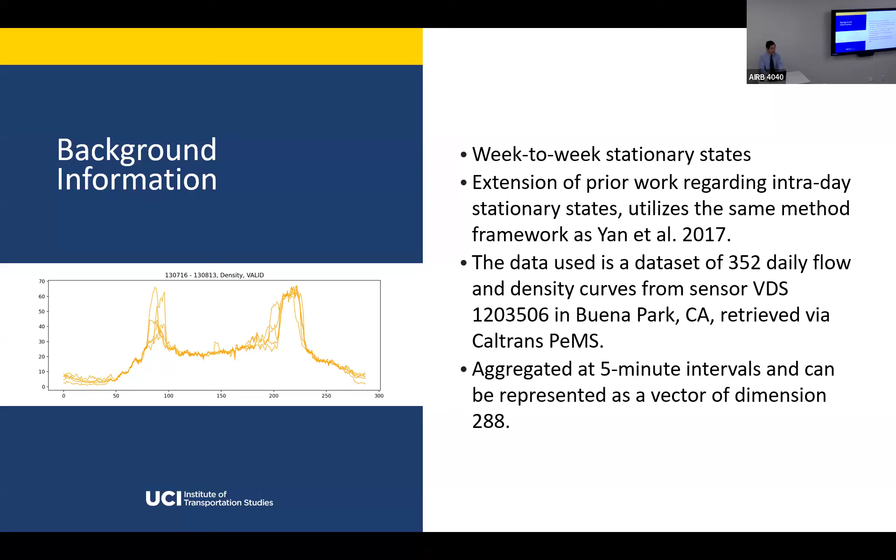Data was collected using 352 daily flow and density curves from sensor VDS 1203506 in Buena Park. It's an aggregate of 4 lanes, and the data was collected between 2011 and 2017. Two periods in this dataset were discarded because of lack of sensor uptime. The minimum granularity provided in the PEMS dataset is 30 seconds, but we used 5-minute data intervals because this reduces some of the variance and noise in the data.

This method has 3 steps. Firstly, we can use heuristic threshold values. That is the value at which a curve is considered too non-conformal for a segment. I'll go into this a little more later.

We iterate over penalty values using the Pelt method to find the one with the most meaningful state candidates. With this appropriate segmentation, we can determine the maximum distance threshold best for outlier detection. If the initial and final threshold values have a significant difference, we reiterate this method with a different initial threshold. We discard segments of length 2 and below as insignificant to be determined as a week-to-week stationary state.

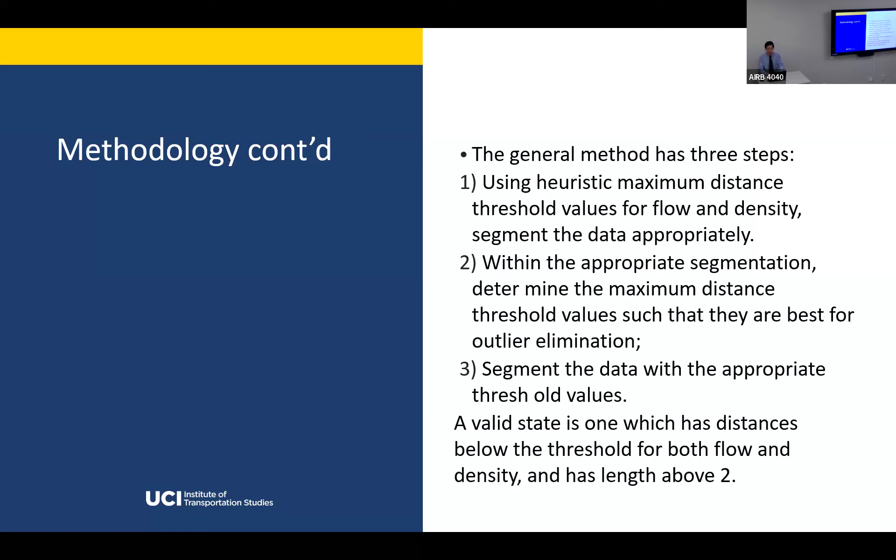To segment our flow and density vectors, we use the Pelt method. Pelt stands for pruned exact linear time. It's a method in which, as stated in linear time, we can find a segmentation that reduces the variance amongst individual segments in a time series.

We can minimize over and underfitting through our choice of the penalty value, minimum distance, and the threshold. That is the value which the Pelt method seeks to minimize - it's a sum of the cost function and a selected penalty value. We will use the radial basis function kernel for our cost function.

As we stated, data is collected in 5-minute aggregates, so every day's flow and density curves can be represented as a vector of length 288. The radial basis function kernel transports each 288-dimensional vector into a higher dimensional Hilbert space. Since the space cannot be worked with directly, we utilize the kernel trick.

The benefit of using the radial basis function kernel here is that we can identify the underlying distribution from which the traffic curves come.

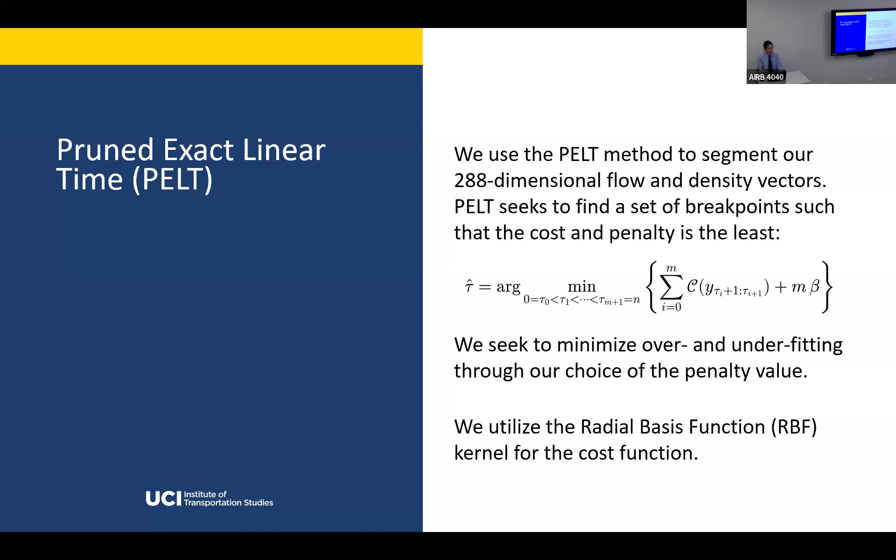The original method used in the previous paper that we were trying to extend used L2 Euclidean distance, and we believe that the radial basis function distance is more robust than this distance metric.

So now we go into the actual experimentation with the data. Using our heuristic threshold values, we can find the penalty value with the most valid segments. The segments are defined as the points between two consecutive breakpoints in the breakpoint union of flow and density.

We apply the PELT method separately to both the flow and density time series, then take the union of these two. By selecting the one with the most valid candidate intervals, we can minimize over and underfitting. If we overfit, many intervals will fall below the length threshold we set at 3 weeks, and if we underfit, intuitively the amount of valid segments would decrease. We find the most valid candidates at a penalty value of 0.037.

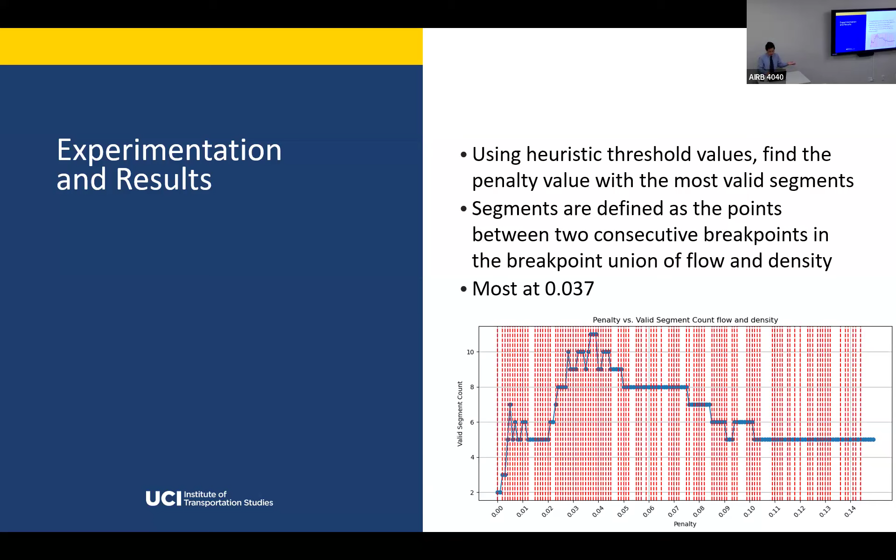Now, the second step is to appropriately choose our distance thresholds. Firstly, we assume that the median distance in this distance distribution represents what should normally be acceptable for a near stationary state. The goal is to filter out segments which contain abnormally high distances from the segment mean, which cannot be considered within the stationary state.

As we decrease the threshold value and start to lower it, we would initially expect that the root mean square distance on average decreases, as it's more conformal to the distribution. Once we start to overfit this threshold value, it would increase again as it's no longer conformal to our distribution. So this is sort of a correlation, if you will, to see how well everything conforms with the initial distribution.

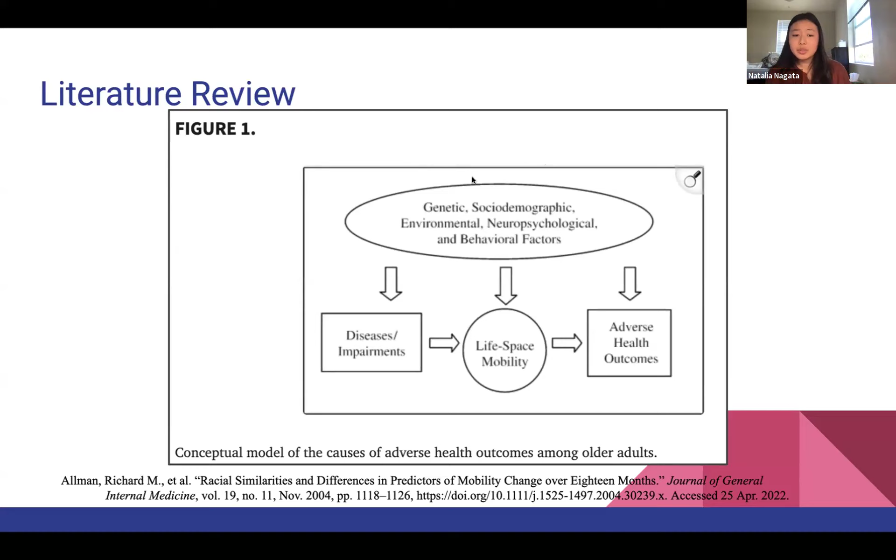This model is taken from a study that basically compared the mobility change between different racial demographics. And basically they created this model that says all these factors like genetics, environment, and behavior can contribute to or influence disease, mobility, and adverse health outcomes.

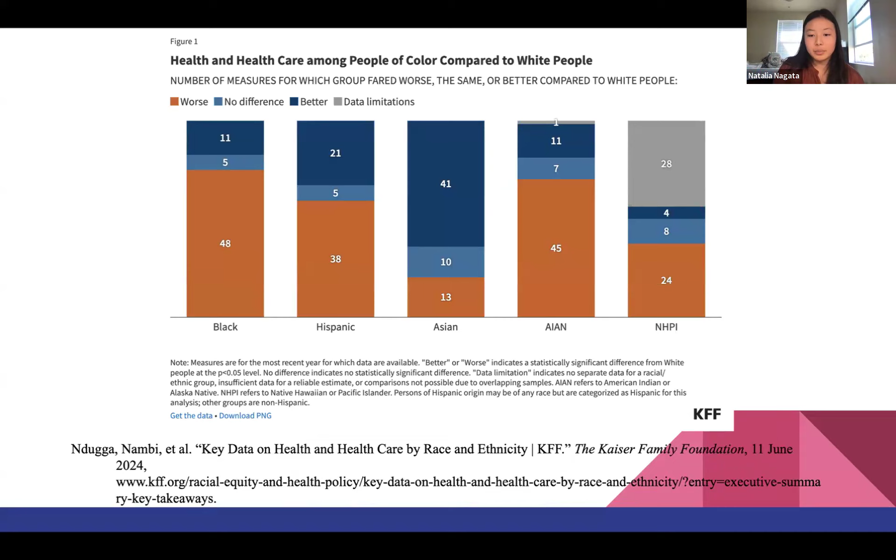And we also wanted to explore the psychological theory called self-determination theory, which was coined by Ryan and Deci. They're basically saying that autonomy, competence, and relatedness contribute to motivation and well-being. So when you have supportive environments, that can enhance these needs, and unsupportive ones can hinder that engagement. And when we have structural inequities in infrastructure, that can restrict choice, reduce perceived competence, and limit social connectedness.

And that can reduce physical activity and fall prevention participation among those who are impacted. Autonomous motivation also can sustain health behaviors more than external pressure, but you also need competence and relatedness to help that. By applying the self-determination theory, we can structure fall prevention programs to support those three needs and boost motivation and well-being to overcome these infrastructure-related barriers to increase fall prevention adoption.

So for our survey design, we used the Likert scale and open-ended questions because those are the most accessible ways to assess what we're trying to find. And we're using 5 different categories: health and wellness, outdoor spaces, social participation, transportation, and accessibility.

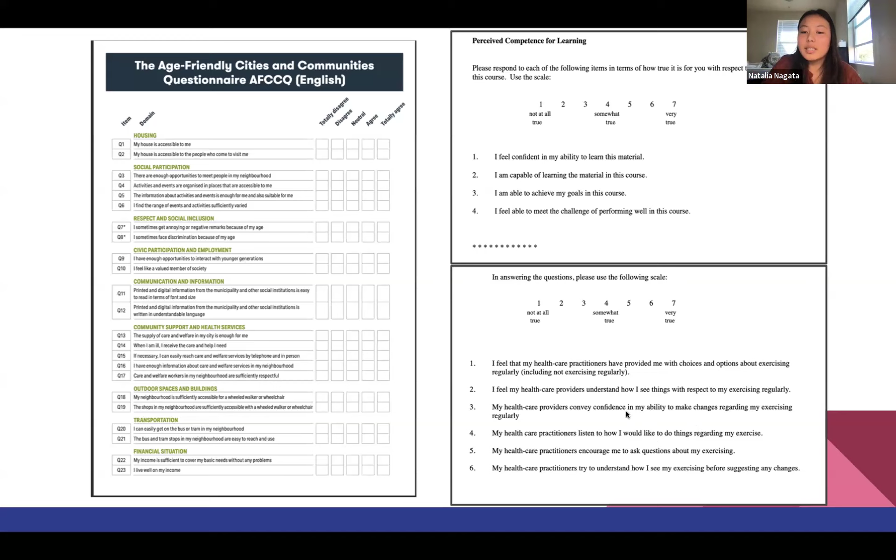This example is for learning, but again, we're using it for physical activity and social inclusion. So questions might be like, on a scale of 1 to 7, how do you perceive your competence in terms of physical activity? And for the healthcare climate questionnaire, a similar 1 to 7 scale, assessing how they perceive their healthcare climate.

For future work, we'll be collecting data in person in Santa Ana, and our project is in collaboration with Advocates for African American Elders. We're going to do a statistical analysis of our survey data and submit the paper to the Urban Studies Journal. That's it. Thank you.

Thank you, Natalia. Questions? May I ask one question? Yes, of course. I might have gotten it right. I think on one slide you said non-Hispanic whites have a lower fall rate, but another slide said Black elderly people have a lower fall-related death rate. Or did I get something wrong? Was that kind of contradictory to me?

Yeah, so that's the literature I found that I thought was interesting, in the sense that my literature review is trying to convey that despite existing research saying that Black or African American older adults tend to experience fatalities less than white older adults, they also have worse access and quality of healthcare. I think our project can address that gap, and maybe we could see if we could bridge that gap.

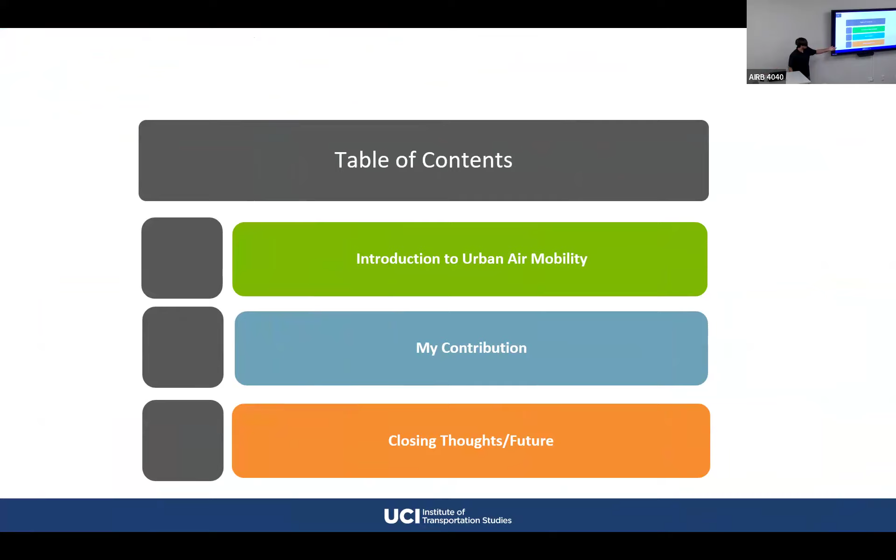So for a brief table of contents, first I'm going to introduce the topic and then present my work, and then I'll have some closing thoughts and reference work.

So first of all, what exactly is urban air mobility? Urban air mobility is the subset of advanced air mobility, specifically defined by the Federal Aviation Administration as enabling highly automated cooperative passenger or cargo air transportation services in and around urban areas.

Take Southern California, for example. For our case study, the primary purpose was to alleviate traffic congestion using eVTOL, which stands for Electric Vertical Takeoff and Landing Aircraft, which I have a photo I'll show in a moment. Because of course, we've all driven on the 405, we know how bad the traffic can get. Some examples of current front runners in this brand new topic is Joby Aviation.

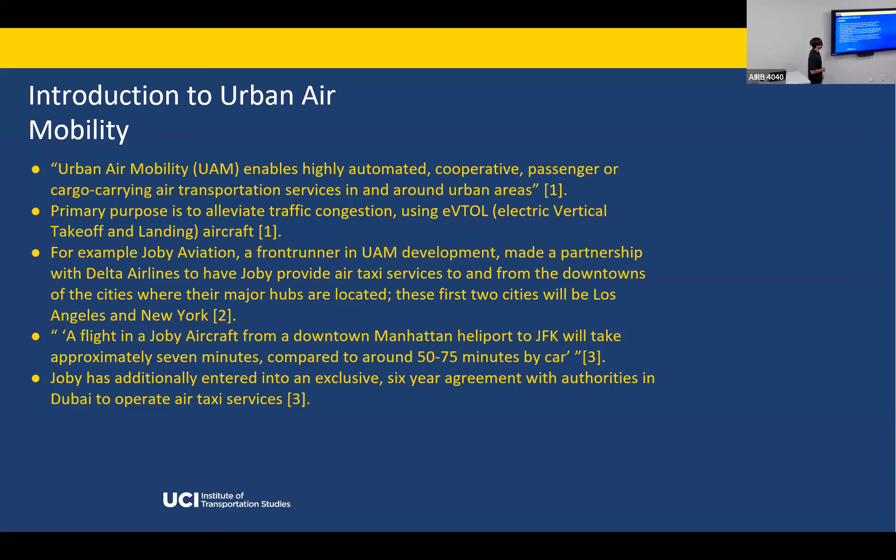They have actually just signed a partnership about 2.5, 3 years ago with Delta to provide Joby air taxi services in between the downtowns of their major hub cities. The first two of these cities will be Los Angeles and New York, as those are some of their largest bases. According to Joby's CEO, a flight on these Joby aircraft from downtown Manhattan to JFK should take about 7 minutes, compared to 50 minutes to an hour and 15 minutes to actually drive in a taxi or an Uber. Joby has additionally entered into an exclusive 6-year agreement in Dubai to operate air taxi services.

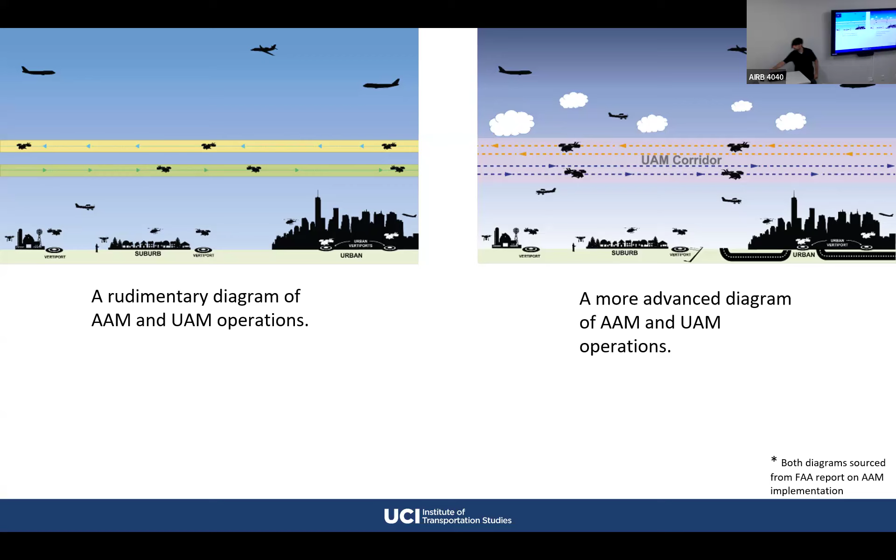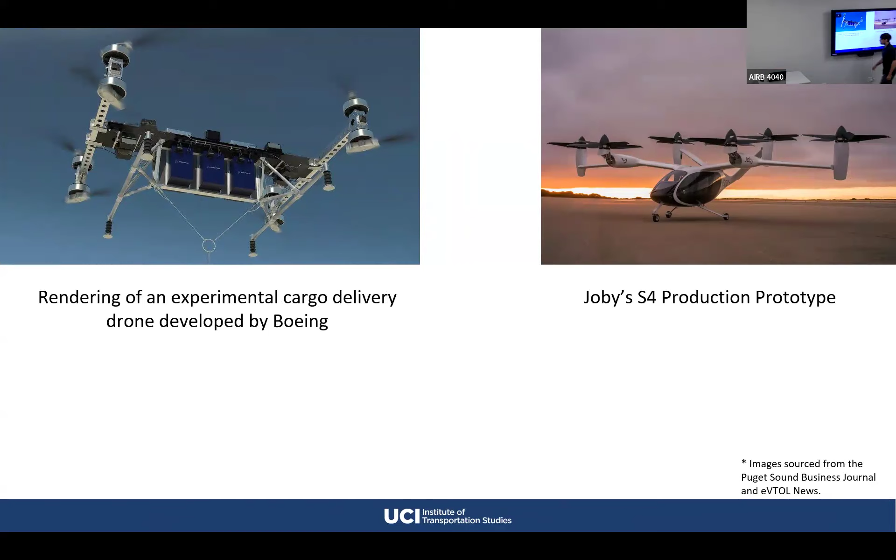As we may or may not know, the skies of Southern California are some of the most congested airspace in the world. Of course we all know about congestion living here in Southern California, there's traffic everywhere and people everywhere. As such, these UAM routes have to be carefully planned in order to not interfere with so-called legacy traffic, which Professor Nguyen mentioned briefly earlier. That is just pre-existing pilot-controlled aircraft.

Think of your average American Airlines flight, for example, or a UPS cargo flight. The three main ways for UAM flights to avoid interfering with this legacy traffic is to either fly above it, fly below it, or just avoid it entirely. But because arrival and departure procedures are different at different airports, since their runway configurations are different, UAM route planners need access to some kind of tool so they can visually see where these legacy traffic patterns are going. That way they can plan accordingly. That was my primary task: to develop a preliminary tool that we can use to model legacy traffic patterns into airports.

So, implementation. The case study that we chose to analyze for the summer was just a basic route along the 405 between right next door here at John Wayne Airport and then Long Beach Airport. We're using ADS-B positional flight data from OpenSky's network. This ADS-B data means all aircraft are equipped with a transponder that provides signals to air traffic control about the speed, the heading, and the position of the airplane. We're taking that data that was collected from various receivers everywhere, including obviously airports, and that's where we're getting the data from.

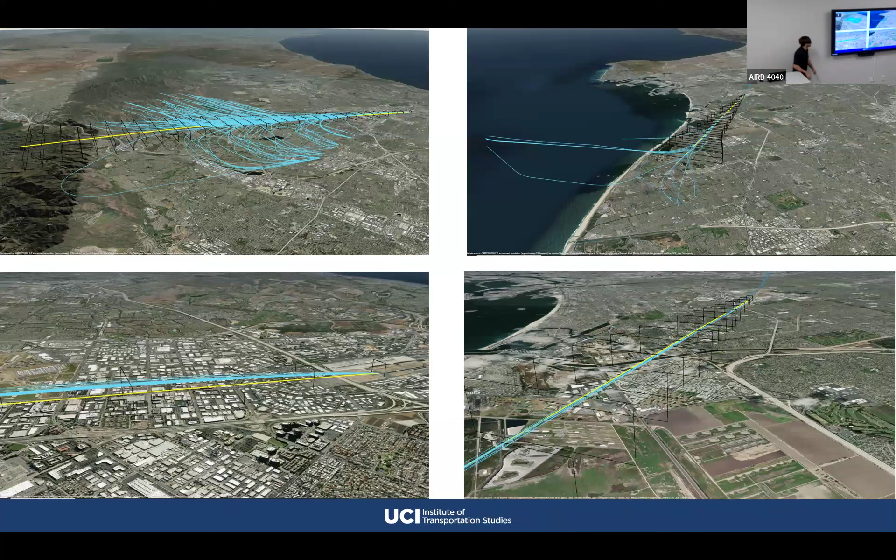All right, so let me go through these one by one. First of all, up here on the top left, these are called flight tracks. These lines represent arriving aircraft into John Wayne.

As you can see, they're coming from two different directions. Down towards the bottom right, they're coming in from the Bay Area and stuff. Then these ones are coming in from other areas like Chicago or Phoenix. But they all kind of follow this yellow reference path that I was able to draw, and they all come into these rectangles, which we're calling containment zones, so they're in as concentrated an area as possible. That way the UAM route planners can visually see where they can fly and where they cannot.

And down here it's just a zoomed-in feature. This would be classified as short final, so within less than 500 feet before the runway, the tracks come in, and then of course they end right here at the end of the runway.

And then here's one for Long Beach. There's not as many tracks on the Long Beach one because, funnily enough, the data I took was from April 1st and April 2nd of 2024. And I think they pulled some kind of April Fool's reverse trick on me.

So normally the arriving runway is runway 30 at Long Beach, but I believe on April 1st, because of weather or whatever else, they had to reverse operations. They were coming in and landing from the northwest instead of the southeast as typical. These darkish blue tracks, I believe, represent go-arounds, and then they came around to do the actual reverse procedure.

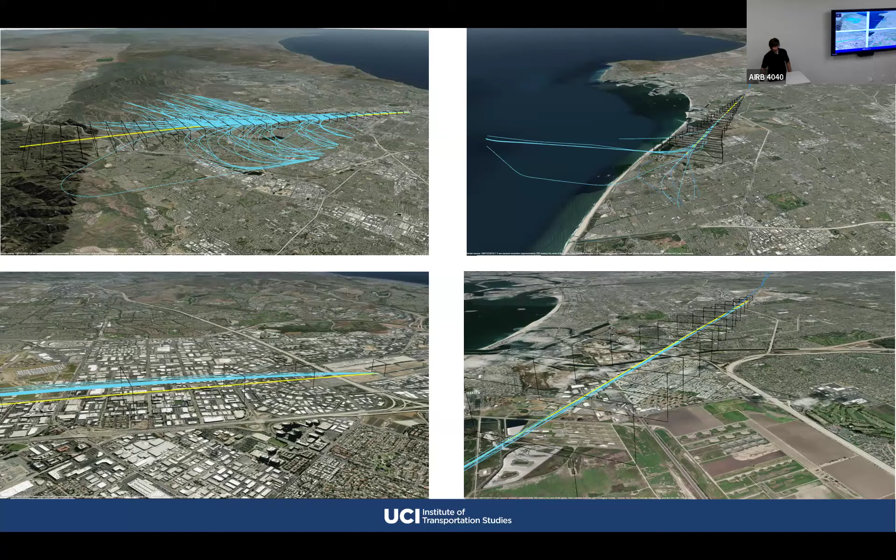So in conclusion, because this concept is in such an infancy, there's plenty of other boundaries that need to be considered. But I chose to specifically focus on mapping these legacy corridors, because that is arguably the most important, since this is what the FAA needs to see as evidence to prove that these UAM vehicles can operate safely and efficiently without interfering with legacy traffic, which of course we don't want to end up in the hands of lawyers and everybody else.

So tools like this, the one I've been developing, need to obviously continue to be improved. As I mentioned, this is a very preliminary tool, and the idea is to develop it so there's access to all airports and all specific arrival procedures. That way these UAM route planners can account for everything. And once they do that, UAM operations will be able to get off the ground.

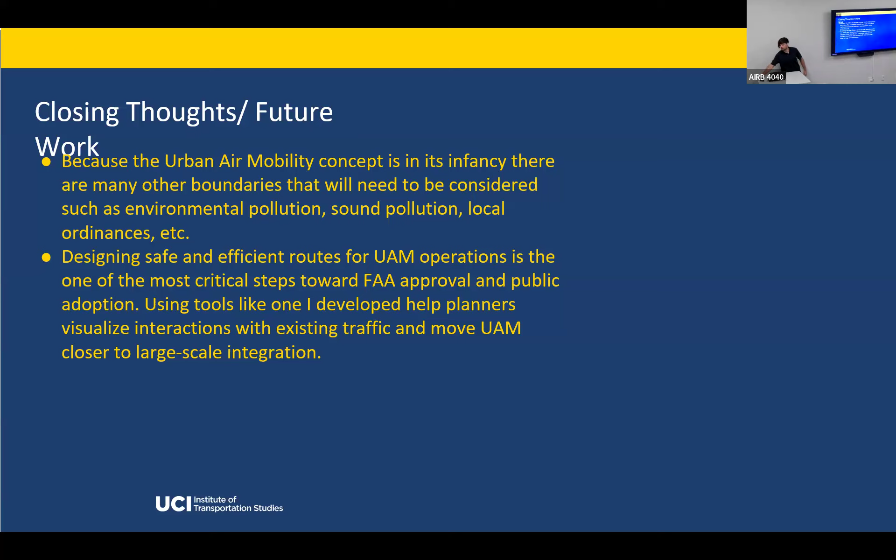And that's all I have. Any questions?

Okay, so just out of curiosity, how much does it cost? A trip, let's say from downtown to a major airport for a passenger? Well, that was actually not my specific area of focus, and in fact Vika is going to be talking about that, so she will be able to answer that question.

I think I have a question that was on your side. Besides airports, what would other no-fly zones be? That would have to be determined through community outreach, and that's one thing I should have mentioned. I primarily focused on airports because that's arguably the biggest hurdle, but then it would be the companies working with communities to establish specific altitude or noise restrictions, like at John Wayne, there's the noise restriction of no takeoffs or landings after 10 PM.

And a follow-up, I'm thinking about other areas. Would the tools you developed also work in suburban, rural areas? Yes.

I should have also mentioned that I didn't really consider general aviation, even though there's a lot of it here in Southern California. I didn't consider it for my models because it's not as predictable, because with general aviation you can get in your airplane, take off, and do whatever you want, whenever you want. But yes, you could do it because even general aviation has those transponders that transmit information, so by just changing the lat-long areas where the data is being processed, you could adapt that accordingly.

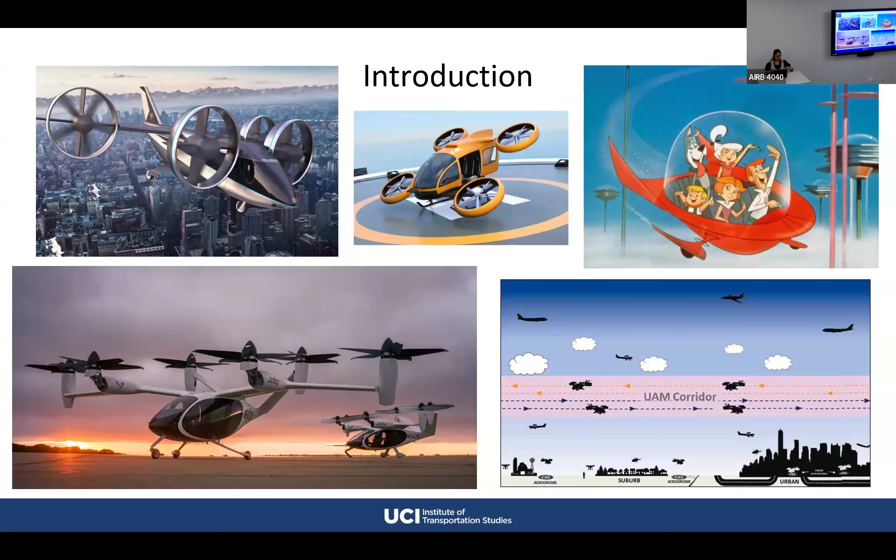In order to maximally avoid scenarios like UAVs flying low over residential neighborhoods or ticket prices rising to exorbitant and unaffordable levels, air taxi routes must be carefully pre-planned and optimized, compared and contrasted for factors such as ticket price, energy consumption, and no-fly zones, with a focus on being the least disruptive and most additive to public life.

In order to investigate the impacts of future air taxi innovation and more easily communicate my findings to impacted communities, I used MATLAB to develop a model to graph prospective air taxi routes onto a map of the Irvine area and calculate important factors for consideration, like distance, energy, and cost of flight.

The map has an adjustable zoom, and the user input is in the form of clickable or typable waypoints that the UAV will fly over in its path. The user can also adjust the altitude of each waypoint to mimic takeoff and landing for more precise estimates, and there is an optional flight animation in the perspective of the air taxi to get a better idea of the path and any obstacles that might be on it.

I wanted this model to be equally accessible to researchers judging the efficiency of a flight path and communities that want to become more informed on the functionality and limitations of air taxi flight.

The bulk of my model's usage is not in graphing the flight path, but in calculating the energy and cost consumption of the UAV on the selected route. In that vein, the two major components of my work that I'm going to discuss today are the energy model and the cost model. To make more accurate predictions, the program needs a few specifications on the type of air taxi being considered for the flight.

Mass, speed, purchase price, and passenger capacity are some of the required parameters. The baseline estimates you see in the model today, by default, are based on the prototype Joby S4 electric vertical takeoff and landing vehicle, which is the most advanced UAV prototype from Joby, a current leader in the industry and partnered with NASA to further urban air mobility.

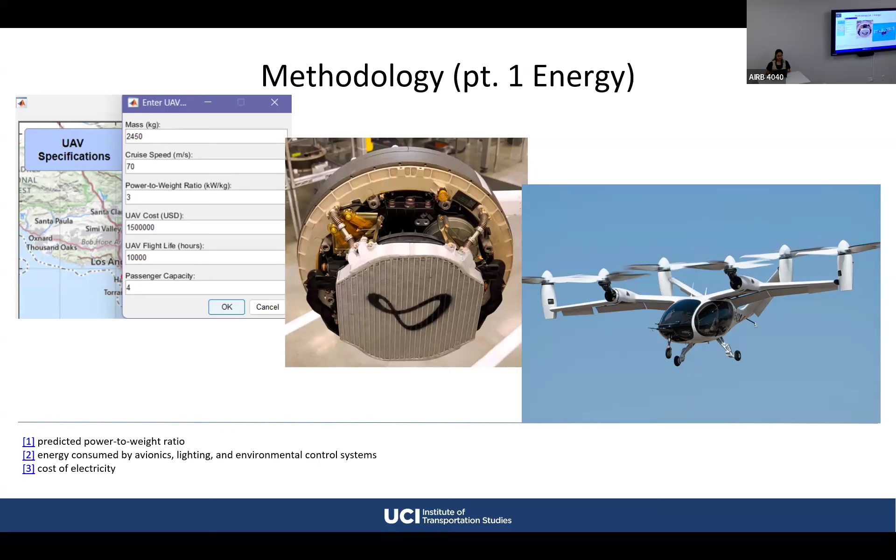There are many factors that influence the cost of operation, and therefore ticket price, of an air taxi flight, no matter how quick or short it is. The most expensive of which is the energy consumed, calculated previously, but this value is closely followed by capital costs of the UAV, things like infrastructure, insurance, and part replacement costs.

In my cost model, large upfront costs are split apart and paid essentially hour by hour over the duration of the UAV's flight life. A safe prediction for a UAV is to average up to 10,000 hours of flight before it needs to be retired. So every hour the UAV flies, there's a set base price, so investments into it can eventually be paid off.

There's also a set price for an air taxi flight regardless of path length, due to costs incurred during ground time, the periods preparing the UAV for launch and ensuring its safe landing. Another essential aspect is crew and maintenance costs. Higher salaries will be required for the specialized personnel required to pilot the UAV during flight, guide it during taxi, and repair it during maintenance.

Additional maintenance costs are incurred during mandatory yearly checkups and parts overhauls every few years to ensure the UAV's smooth running. Slightly more difficult to model are the indirect costs, such as marketing fees or hangar infrastructure, that can be reliably estimated at around 25% of the direct costs. Taxes would increase overall costs by another 10% at minimum.

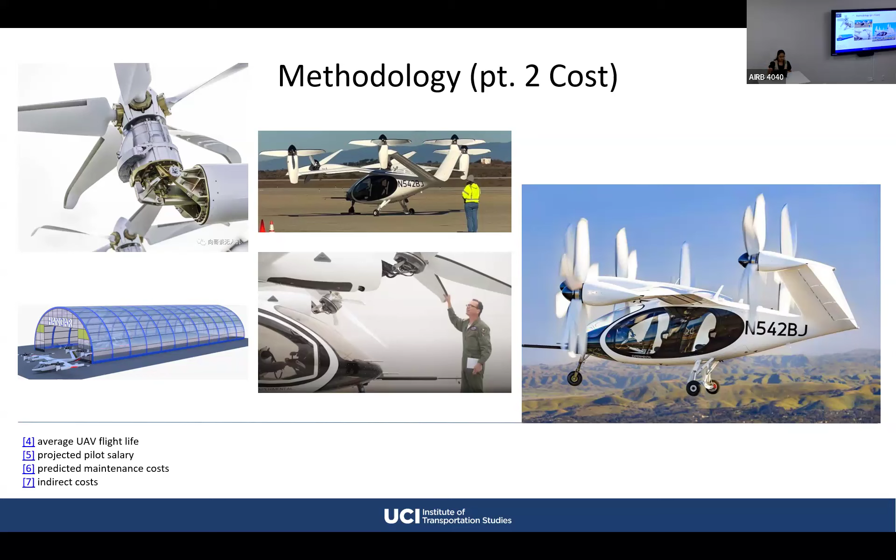There's a video right here.

Now for the application of the flight path route model, I have a video demo of MATLAB where I'll chart out a short UAV flight over the Irvine area.

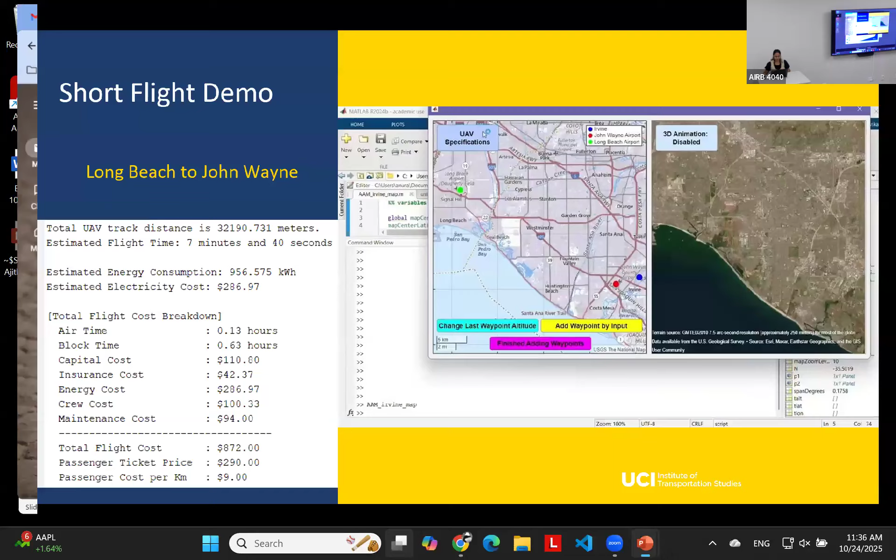Still pictures of the model, but this would be how it looks. There's a little animation, but either way...

Based on current predictions on UAV infrastructure, the flight will be between the existing Long Beach and John Wayne airports, prime locations for adding UAV vertiports required to launch and land air taxis. The UAV will not take a direct path between them, instead sticking closely to existing highways so there will be minimal disruption to surrounding communities, flying at a standard altitude of 2,000 meters.

On the left-hand side of the model, you can see a 2D map of Irvine with a data tip that follows the location of the UAV on the path and gives you values such as its altitude, longitude, and latitude. On the right-hand side, the UAV's route is plotted on a 3D satellite map, and the camera angle follows the air taxi and what it would see on the flight.

Finally, we have the calculations made by the energy and cost models displayed in the command window. You can see the flight took around 8 minutes, and accounting for ground time, in which the air taxi prepares to launch and land, passengers spent 38 minutes in the UAV. The flight covered 32 kilometers, consumed 957 kilowatt hours of electricity, and had a total cost of $872.

The predicted passenger ticket price is $290, and normalized for distance, the passenger is expected to pay $9 for every kilometer flown.

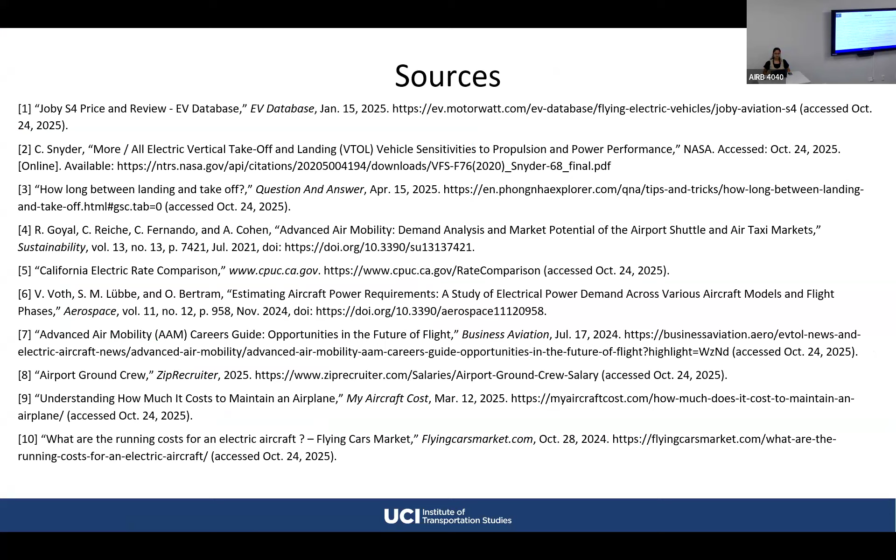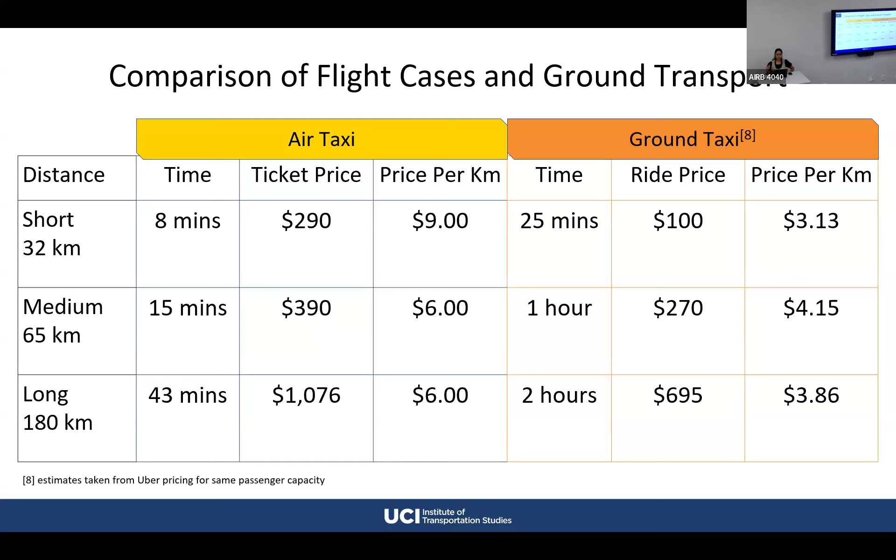So this was really interesting. I have two questions. The first one is I didn't understand exactly how did you translate the total cost of the flight into the ticket price per passenger. How did you go from that?

Okay, so the total cost of the flight is made up of a few main pieces. The two biggest pieces are the cost of energy, the electricity consumed by the UAV, and the capital cost of how much the UAV cost when it was bought. The Joby S4's predicted price is around $1.5 million. So in order to pay back how much the UAV costs, for every hour it flies in its predicted 10,000 hour flight life, you divide that $1.5 million by that hour, and depending on how long the UAV flies, you add that charge to the ticket cost.

The same thing is done for the capital cost, the insurance cost, and the maintenance costs, such as the costs it would take to replace parts like the engine or motors. The crew costs, such as the pilot and the ground crew helping the UAV along, are paid by the hour based on who's working.

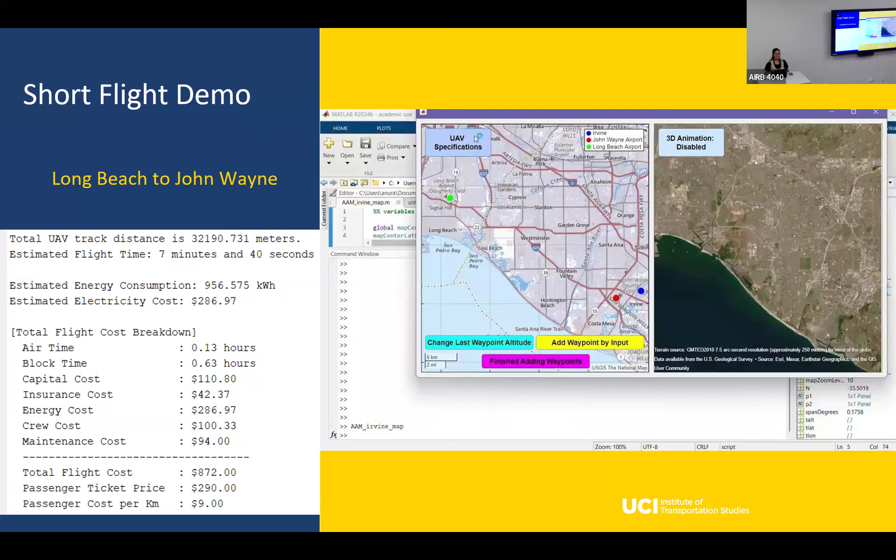But otherwise I did have two questions. What does UAV stand for? It stands for Urban Air Vehicle. Oh okay, I thought it was unmanned air vehicle. In the military, UAV stands for unmanned aerial vehicle. I was wondering if that was a standard industry term. Okay, because I was confused why there was a pilot, but never mind.

That's why I referenced in my presentation, I called these vehicles eVTOL because that's what they are: they're electrically powered and capable of vertical takeoff and landing. But I could see where it would easily be confused using UAV, because it's so synonymous with drones, especially with the military. So I can see where that would become an issue.

The second question was, I know you estimated the life capacity of the infrastructure by the flight hours for these vehicles. Is it important to consider the cumulative number of takeoffs and landings? Because in certain airplanes, the flight time is important, but also the degradation to the vehicle mainly happens at takeoff and landing. So even if you've only flown 600 hours, especially because these are very short flights, you might not rack up a lot of hours, but you're gonna rack up a lot of takeoffs and landings, and you're gonna have to replace that after a certain number.

I sort of accounted for that underneath maintenance costs. So I mentioned there's a cost per hour for the mechanic, but there are also bigger costs for checkups. There's actually a lot of checkups required for UAVs and I think small planes too. There's a checkup every time you launch and land, yearly checkups, and every 3 or 4 years larger checkups that are complete or partial overhauls of parts. During these engine or motor replacements, and especially battery replacements, I estimated that a UAV's battery would have to be replaced at least 3 times over the course of its life.

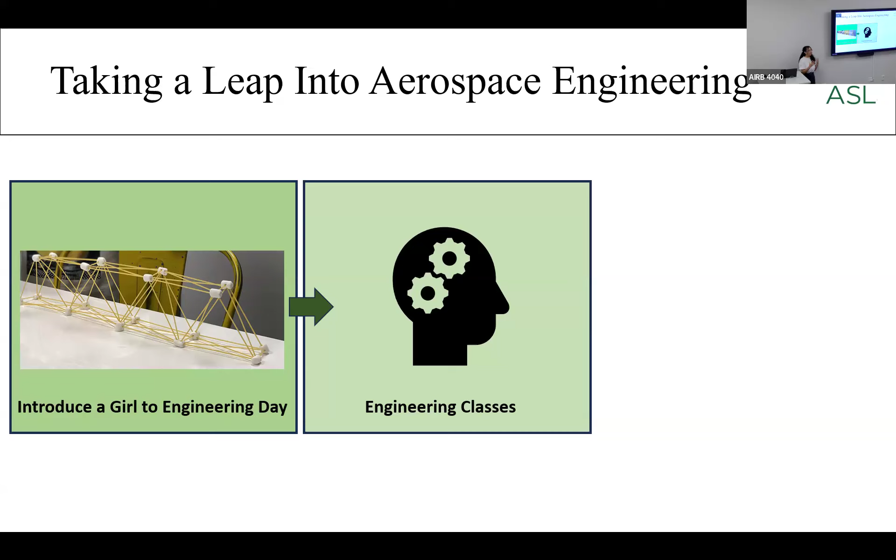So then I started thinking about and getting excited about potentially taking engineering classes, especially as at this point I was starting to move into and transition into high school. So when I got into my high school curriculum and I asked a little bit about what the opportunities were, they told me we don't actually have any engineering classes in this high school. So the closest I got to engineering, at least at this stage in life, was taking mostly your math courses and an introductory physics, as well as some other related work such as chemistry and biology.

But really, there wasn't a formal introduction to engineering, but it was still something that I thought I wanted to do and it piqued my interest. And by the time I got to the point where I had to go in and apply for college, I thought, okay, I want to do engineering, but I actually don't know what kind of engineering I want to be in, especially as now the time is coming up where your applications are starting to come up and you're starting to think a little bit more about these conversations.

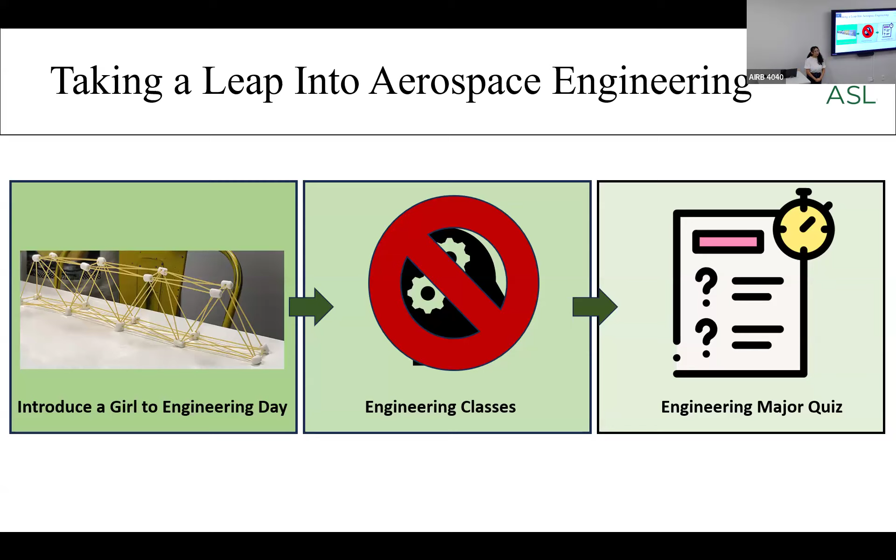So what did I do? I went online and I took an engineering major quiz to figure out what is the best suit for me based on my personality, my characteristics, my likes and dislikes. And lo and behold, this quiz told me I should do aerospace engineering.

So this is actually something I talked about with my physics teacher at the time. And I was like, can you tell me a little bit more about whatever it is that you do know about this? I did a little bit of my own research, but at the same time, didn't fully know exactly what I was getting myself into. So it was a little bit of a leap of faith. I thought it could fit, I liked the sound of it. I thought it sounded quite interesting, but I didn't quite know if it was going to be the perfect fit for me.

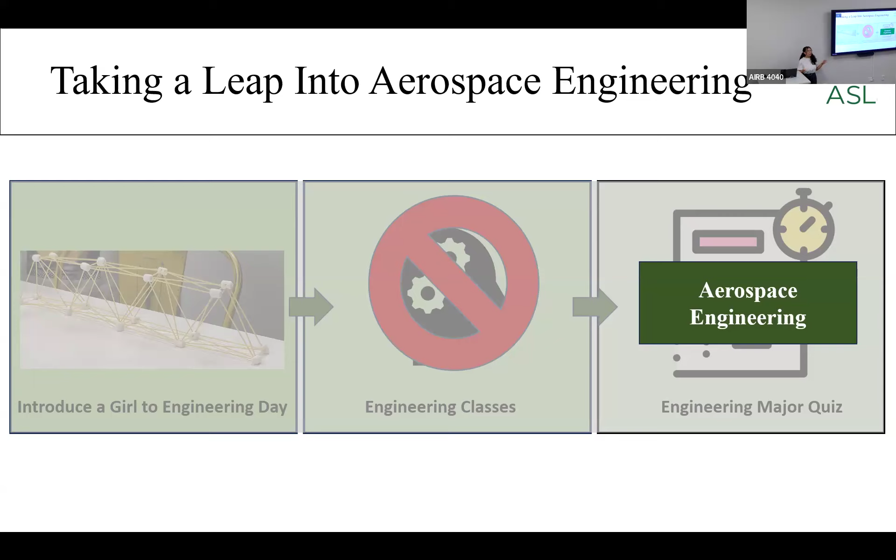So then I went along, I went to UCI, so I'm now in the UCI Samueli School of Engineering at this time, and that was no shocker since I did tell you I graduated from UCI. But there was something that just really was kind of weird about this experience.

Now that I was in college, all my life my parents kind of led up to this: you should go to college, it's so important. And now that I was in college, I was like, okay, now what do I do? I'm here, but I don't know where to go or what I should be doing. So my goal kind of became, you're going to graduate, and then you're going to get this really good job and make some money, help your parents out, and we're all going to be living together and it's going to be great. And I walked into one of my first engineering courses.

Formally, it was an introduction to programming. I actually took this MATLAB course, which is a required course. If you're in any of the engineering disciplines, you're familiar with this course you're going to take. And I remember the first day of class, my professor just kind of introduced the topic and asked, by a show of hands, how many of you are familiar with any sort of coding, even if it's not MATLAB? About two-thirds of the class raised their hand.

And I sat there and looked around and was like, oh, did I miss the memo? Was I supposed to know this as well? I didn't know anything about it. And that's kind of when I started realizing maybe I wasn't ready. Maybe I picked the wrong path. Maybe this wasn't what I wanted to do. Maybe my peers were much more advanced than I was in some of these areas.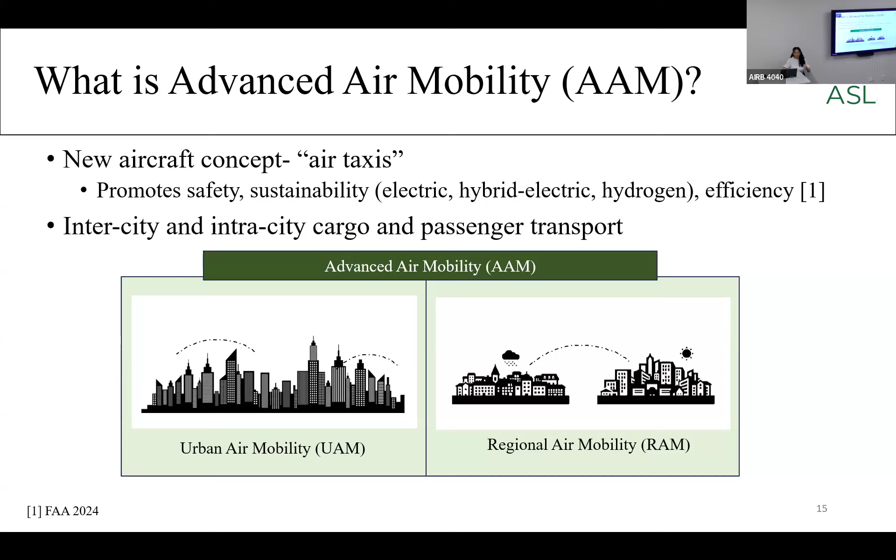We've talked about this concept of air taxis, meant to promote safety and sustainability. There are so many different concepts coming to mind, supporting both inter- and intra-city travel. There's a subset within this bigger term: urban air mobility, which moves between regions in a city, and regional air mobility, meant to connect two separate regions. It's an avenue for connecting things, and there are so many different use cases we consider.

Some use cases are passenger transport, cargo, and emergency relief could also be another category. There are so many different concepts in the market.

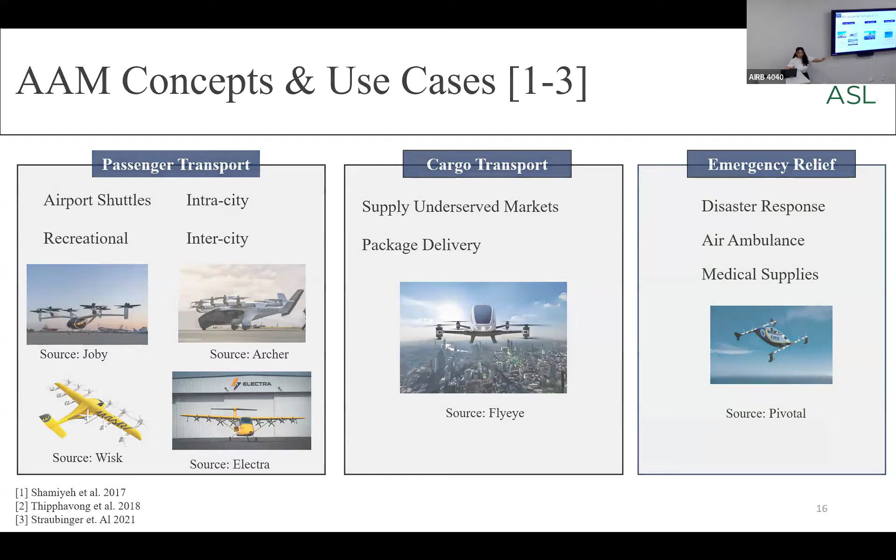So that poses my question, just based on what you've heard: who of you thinks you'd actually get on one? Okay, so we have some good hands in the room, but we also have some hesitation, which is actually very normal.

Bringing in this community element, there are so many potential benefits outlined by people marketing these vehicles, whether it's reductions in emergency response time, creating new employment opportunities, providing relief in disasters, or eliminating congestion in some areas. There are so many different elements these vehicles can tap into.

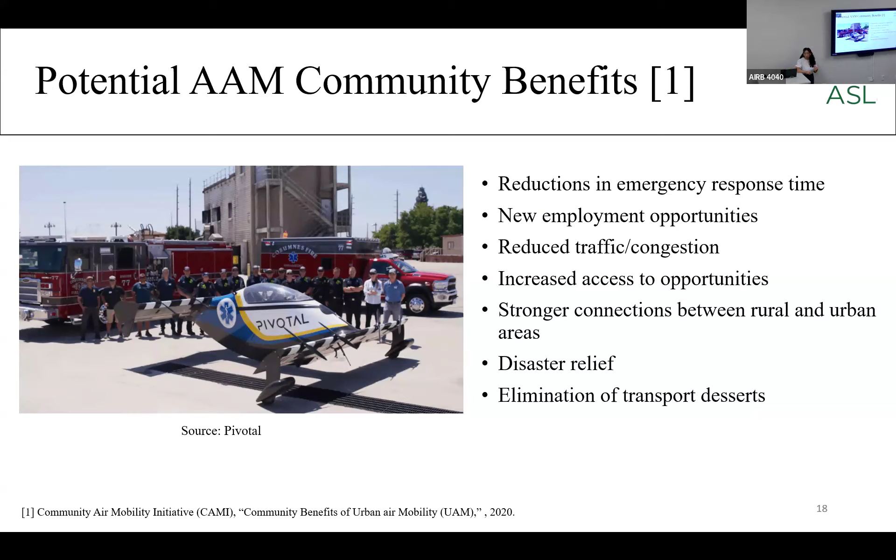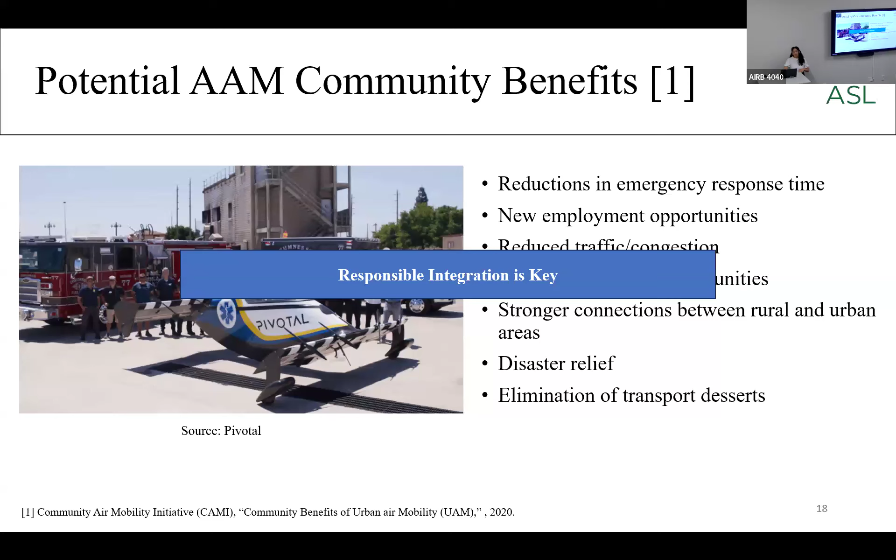But the big question, which has even been brought up in this room, is that integrating these vehicles in a responsible manner is going to be key to their future success. And you're asking, why is this so important? It touches on every person's aspect.

That's a fair question, and it's a question a lot of people have. And it's a statement that's been said: these vehicles aren't intended for me in mind. Really, my work is hoping to transcend that a little bit, instead of thinking about just who is this for, outside of cost, is how is this intending to serve the communities it's meant to be around?

That means taking into consideration new things, such as infrastructure that needs to be developed for these to be sustainable. It also speaks to potential community impacts. If we look around airports, a lot of the people currently impacted by flight operations are underserved and minoritized communities. If we don't plan for the responsible integration of these from the very beginning, those same impacts are expected to happen with this new market.